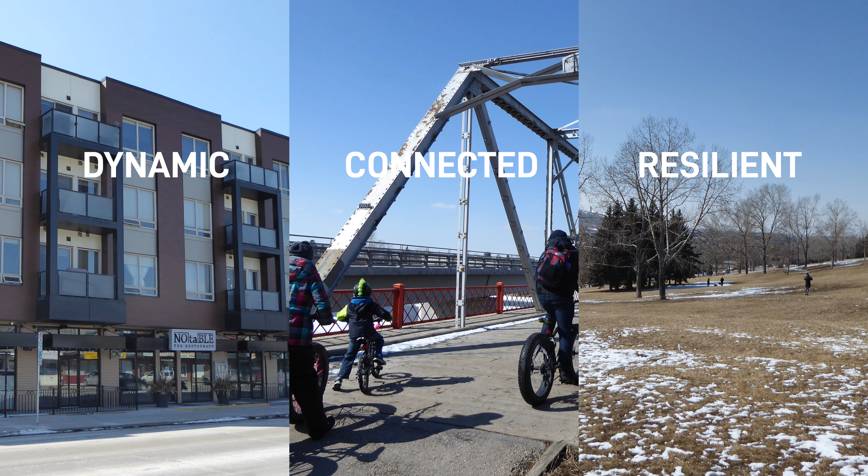Our future vision for Montgomery is a connected, resilient, and dynamic community, a great place for all to live. Our approach will be to connect through placemaking and find a balance between density, connectivity, and open space.

Land use density and built form. We aim to provide more housing and commercial choices to attract a diverse population. We strategically place the density along the main street corridors to encourage movement and active life on the street and support local businesses, create continuity and coherence in the built form, and promote resilience.

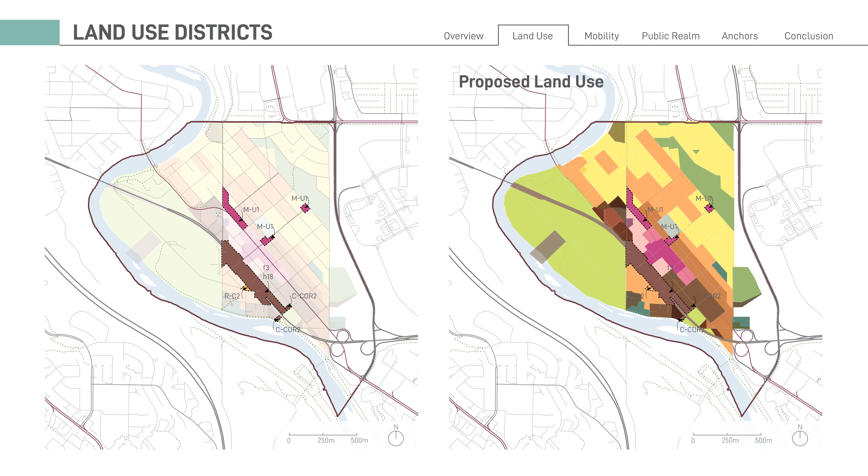This map illustrates the arrangement of the current land use districts in the community. Here you can see the suggested changes to the land use. We are proposing more commercial and mixed use along Bowness Road and at the two ends of 46th Street. We are also modifying the C-COR code on 16th Avenue.

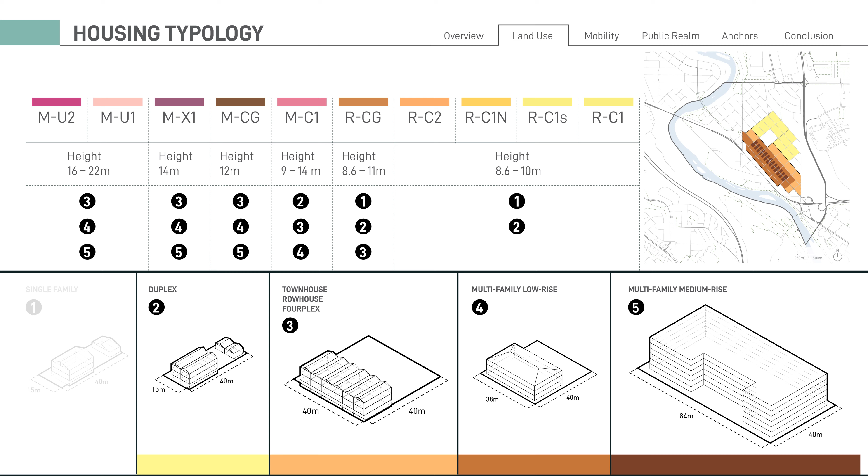Moving on to the housing. This map shows the proposed densification area and the placement of each housing typology on the ground. The single-family lots will be replaced with higher density types. The rationale behind this placement will be explained in the calculation section. The duplexes will be concentrated in this area on the map.

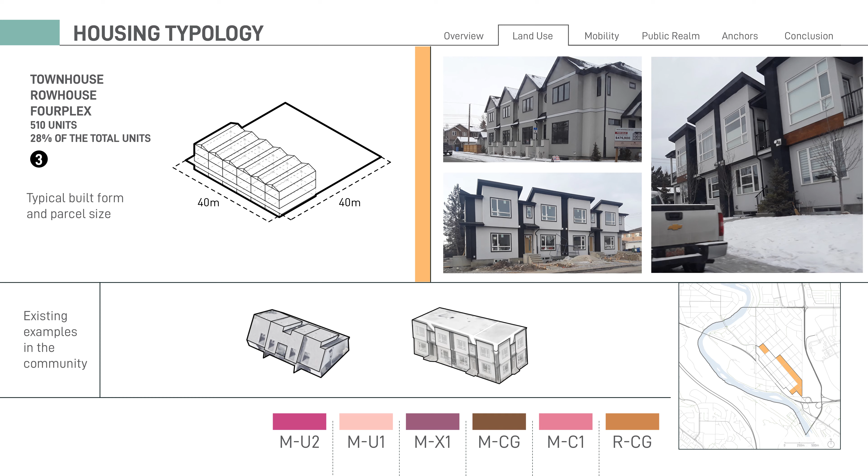Townhouses and row houses are indicated on the map. Multifamily low-rise buildings will be placed in this area. Multifamily medium-rise is indicated on the map. Considering the population growth, Montgomery will need around 970 new units by 2042.

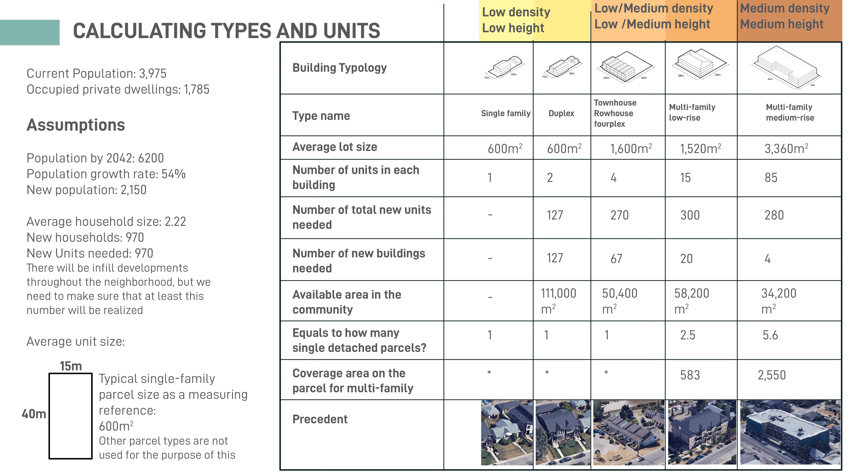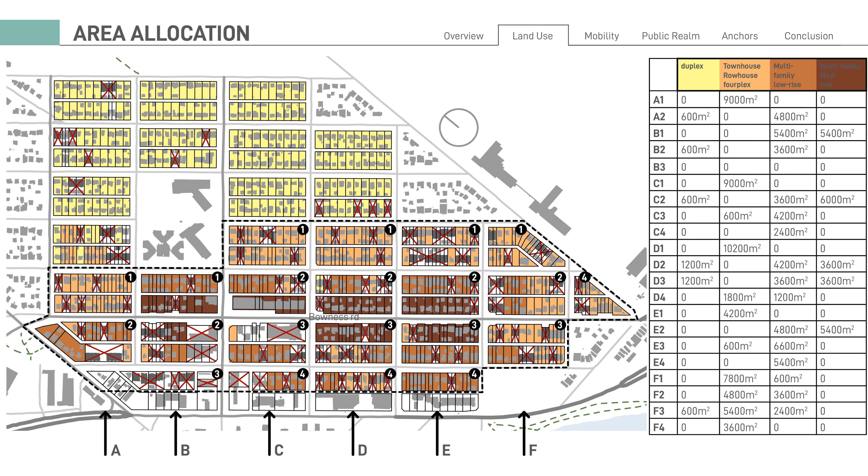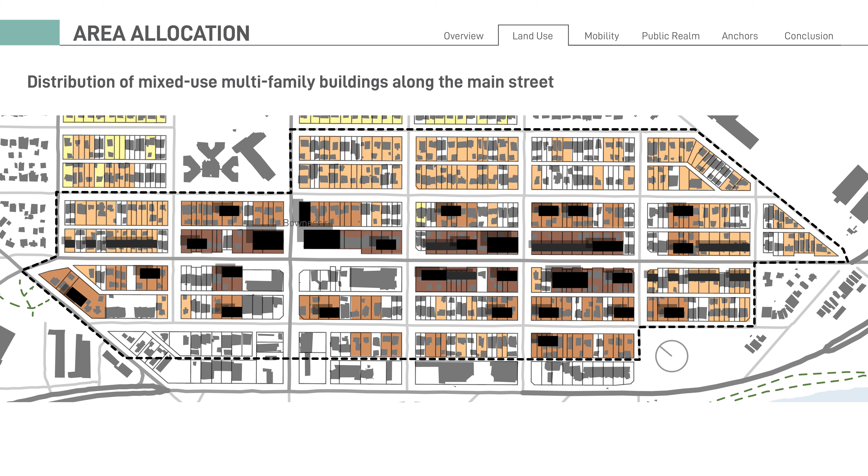This table demonstrates the calculations on the distribution of new units between different housing types. After calculating the development trend, we balance the outcome numbers with the density required for a good urban form. After excluding the lots that are not in priority for development, areas are allocated to the four housing types. This is an example of locating the mixed-use multifamily buildings along Bowness as the main intensification corridor.

Moving to the commercial use, we aim to create a destination with a diversity of businesses, including local independent shops, more coffee shops, restaurants, and food services. Older or vacant businesses should be renewed. We need to rebuild older shops to provide affordable commercial space and invite new businesses.

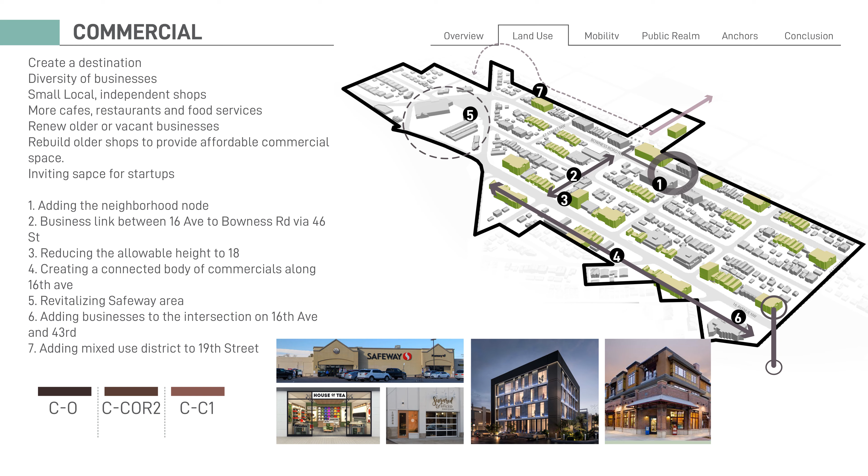Number 4 shows how we suggest creating a connected commercial body along 16th Avenue. Number 5 is about revitalizing the Safeway area. Number 6 suggests adding businesses to the sides of the intersection on 16th Avenue and 43rd for placemaking purposes. And finally, number 7 shows adding a section of mixed-use district to 19th Street to connect with the commercial core in the west. These diagrams represent the overall proposed massing along Bowness Road.

Here is the shadow analysis along Bowness Road in March, June, and December at different times of the day. Placing the taller buildings on the north side of the street and suggesting setbacks on the upper floors has helped reduce the shadow cast on the public realm.

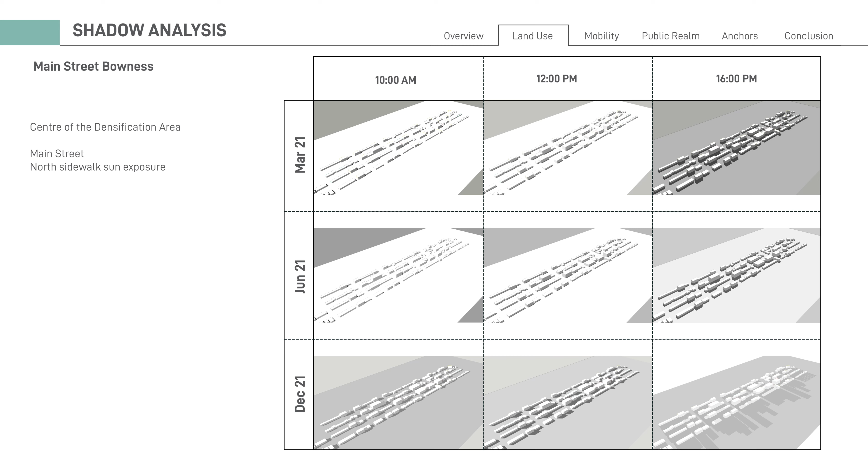Thank you, Azadeh. Now we will turn to mobility. Our goals for mobility include sustainable, inclusive, and safe year-round options. We will demonstrate improvements to the pedestrian, cycling, transit, and vehicle networks, following the city's sustainability triangle, placing walking as a top priority.

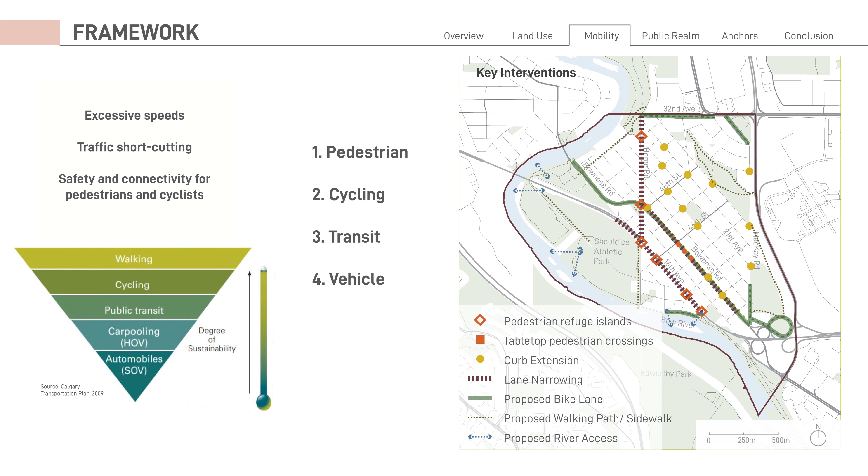A few of our key interventions, summarized on this map, include addressing the issues of excessive speeds, traffic shortcutting, and pedestrian safety and connectivity. Using a road diet strategy, we propose lane narrowing, as the map shows. Our goal is to change the character and feel of these roads, making them desirable connections and destinations. Lane narrowing makes room for pedestrian islands.

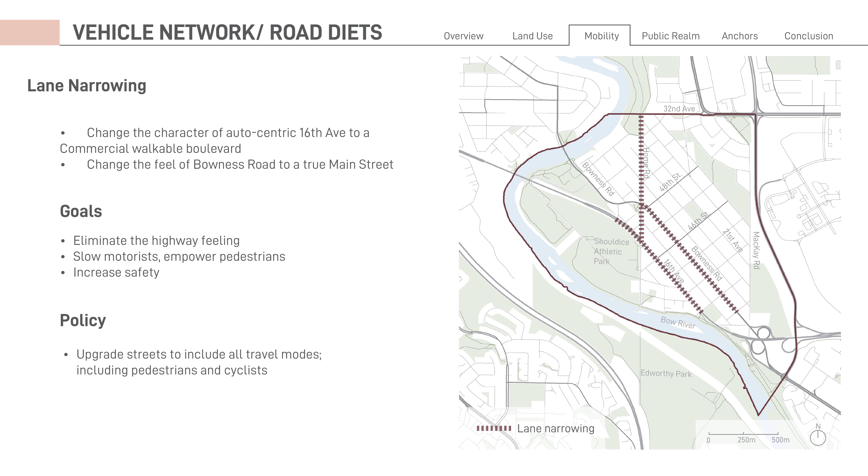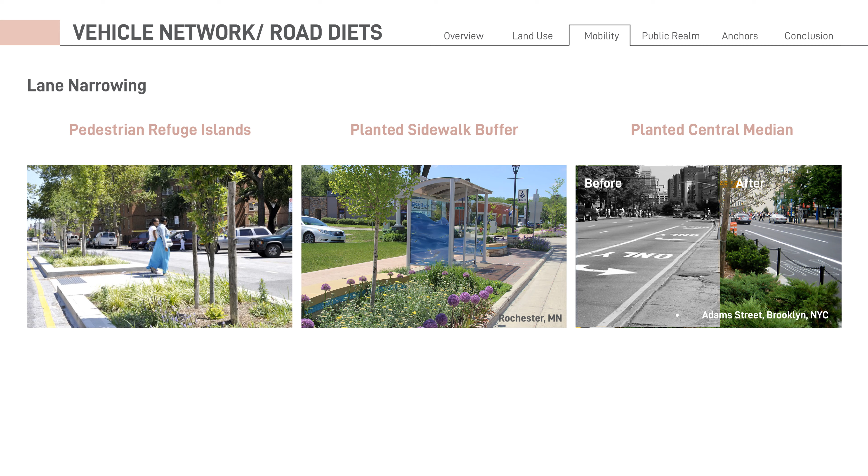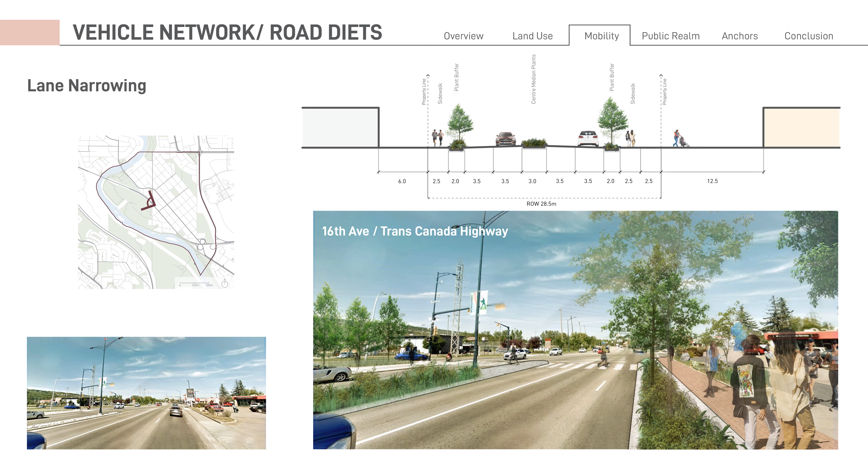Along 16th Avenue, we suggest a planted center median and side medians, as shown. Narrower lane widths gently guide vehicles to travel slower and will reduce the highway feeling. Lane narrowing along 16th Avenue plus pedestrian islands will change the highway look and feel to an urban boulevard. This will also facilitate crossing 16th Avenue and join the two sides of the community. Lane narrowing can occur at the same time as road resurfacing for cost savings.

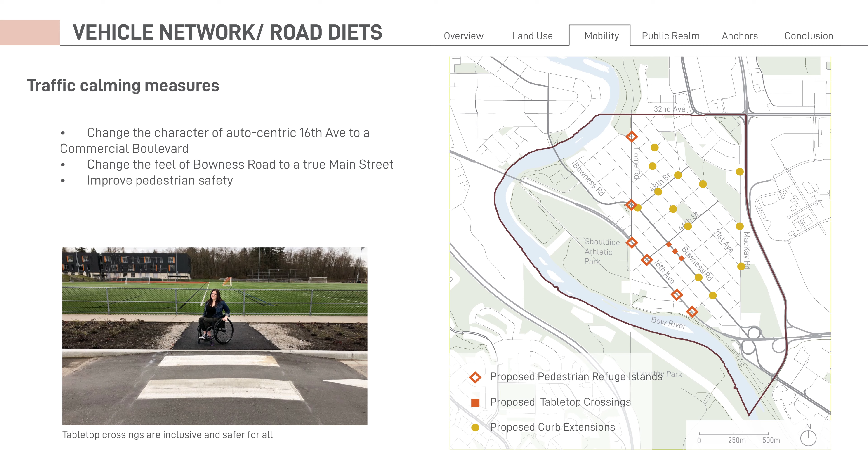Lane narrowing will be paired with several types of traffic calming, such as tabletop crossings shown here. These are to be added along Main Street as the map indicates. These crossings can reduce cut-through traffic, increase pedestrian safety, and take back Main Street as the place to be.

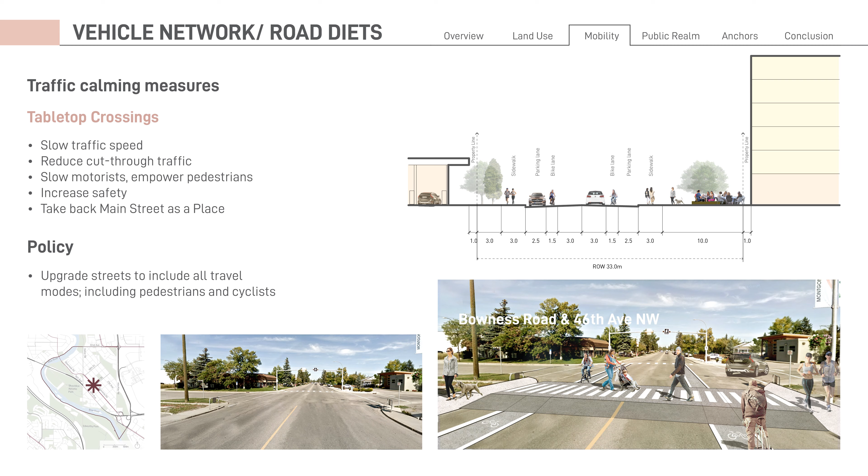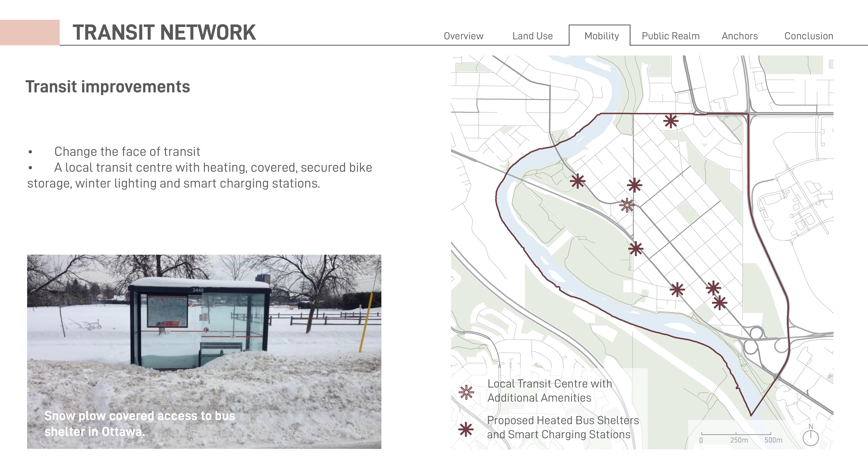Montgomery currently has few transit amenities. Creating a local transit center, as shown on the map, will offer additional year-round amenities. Situations as shown here must be avoided. Seasonal improvements include covered bike storage, heated bus shelters, additional lighting, and smart charging stations as shown.

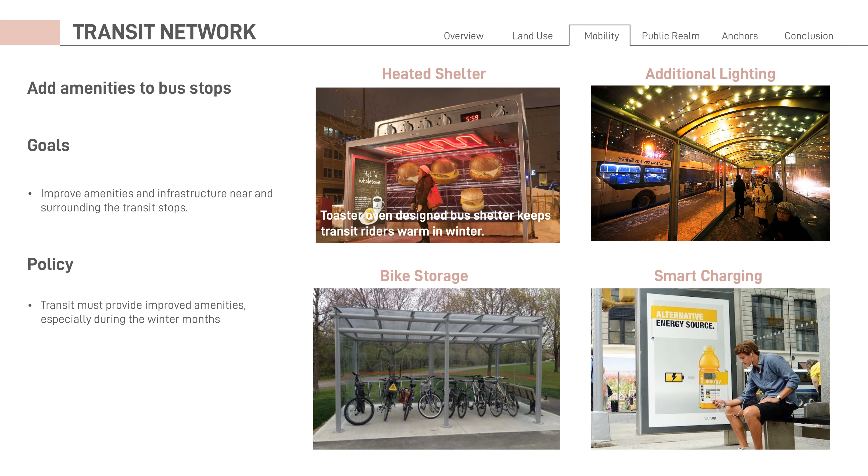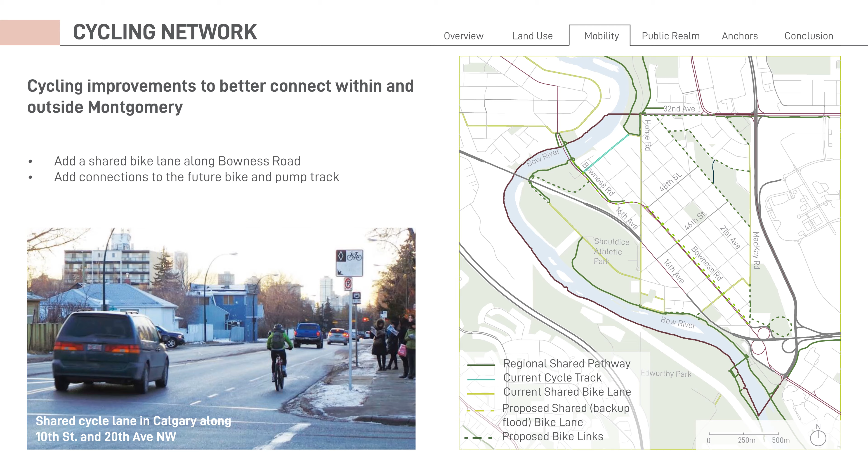This map reveals needs for the cycling network, and we propose a shared bike lane along Bowness Road. This bike lane is needed as a backup for the regional pathway system in the event of future flooding. We will improve connectivity, including the upcoming pump track, while supporting year-round cycle access. The proposed bike lane shares space with the main BRT route, which is a priority for snow removal.

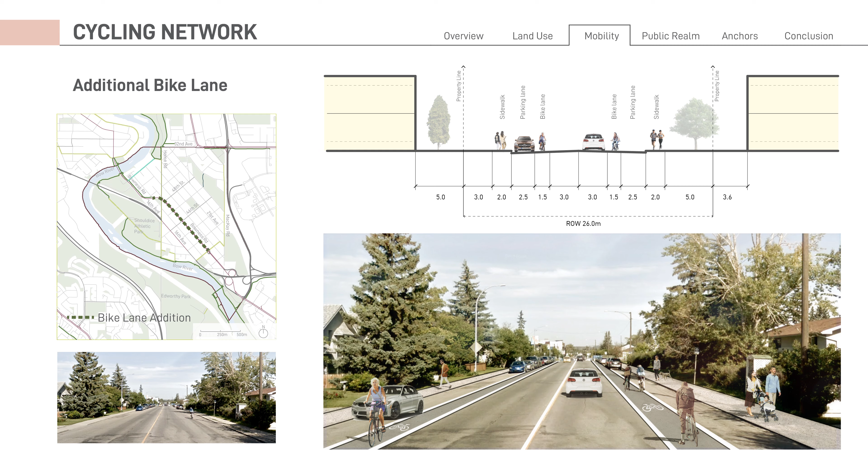Here we see how lane narrowing will accommodate a bike lane. Lane narrowing will slow traffic along Bowness Road and improve the character of Main Street. This bike lane links to an existing one, taking cyclists beyond Montgomery.

One strategy we have designed is loops for groups. This is a series of loops in the community used to arrive at key destinations. For example, Loop B, a shorter beginner loop, covers 3 kilometers. This loop caters to families and travels around Shouldice Park with stops along the river, community playground, and the pump track. Key destinations are marked on the map.

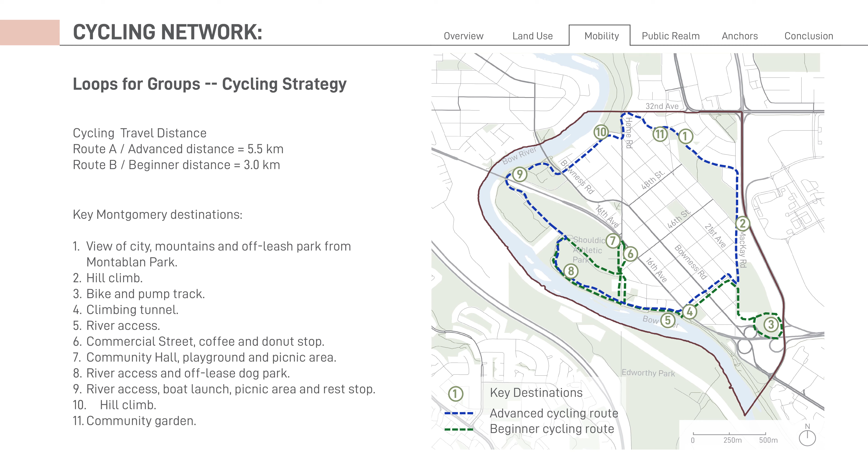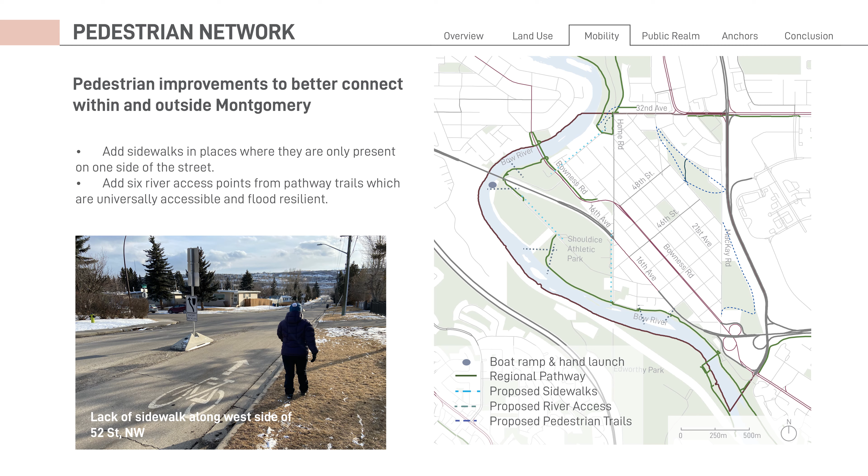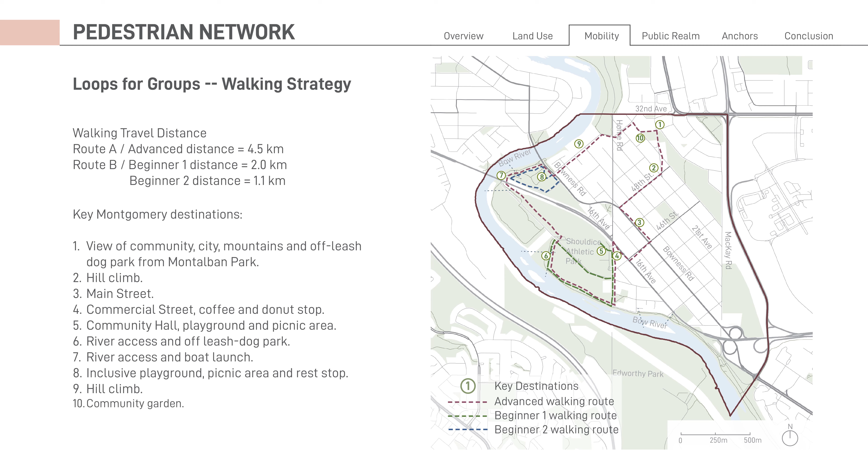Our pedestrian improvements include pathways. There are gaps in the sidewalk fabric, as pictured here, needing upgrades. We have also mapped out 6 needed river access points. Continuing with loops for groups, we have 3 pedestrian loops to accommodate all ages, traveling to key community locations as marked on the map. These include stops along Main Street, the community garden, and more.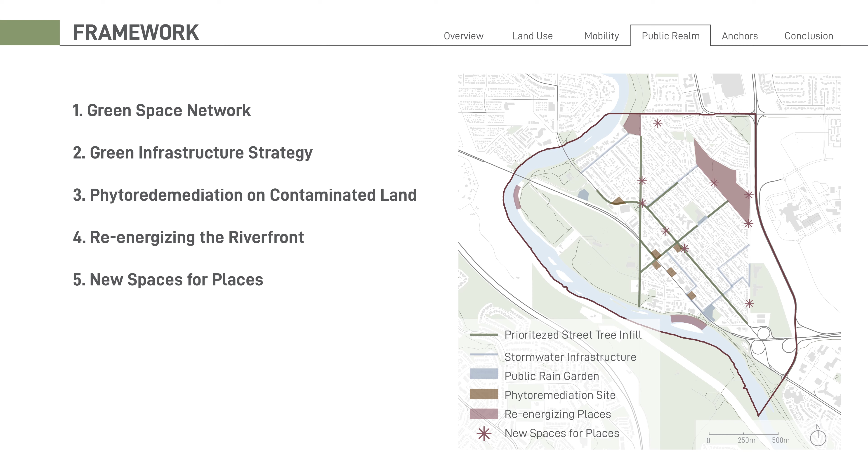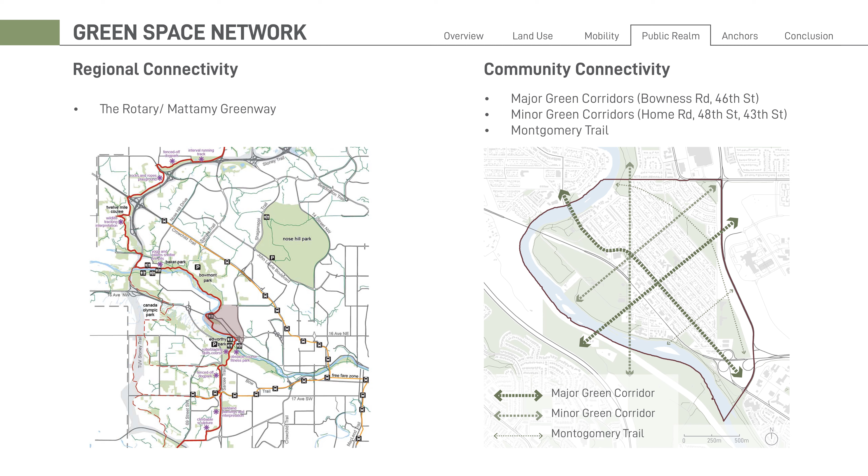It is important to have regional connectivity regarding green spaces to enable users to travel through and on to additional destinations. In these maps, we can see how we will link the various green systems, which also benefit urban wildlife. Our green infrastructure system will include a diverse number of features as shown in this matrix. The matrix further details where each of these features function appropriately.

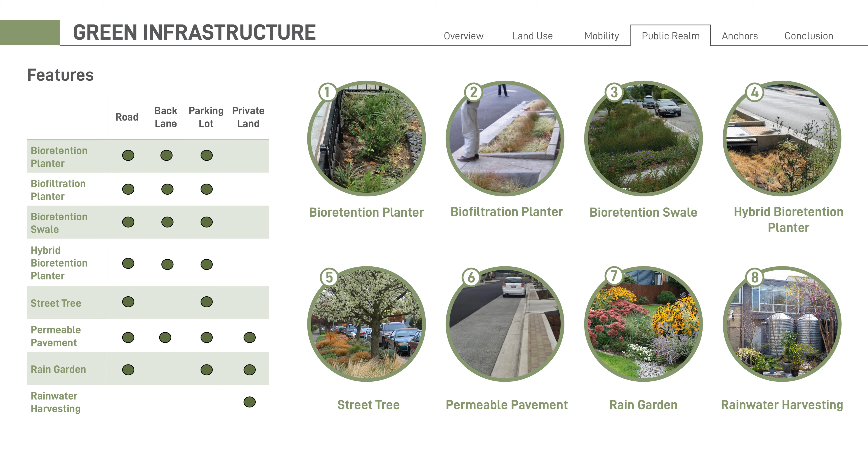In this map, you can find an improved connected network of street trees, where we identify needed areas for densification. We will make a strategic plan and prioritize trees for phased implementation.

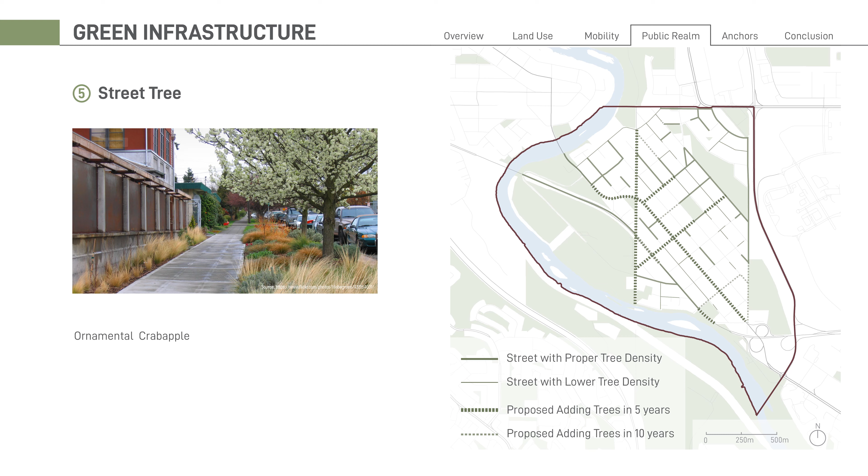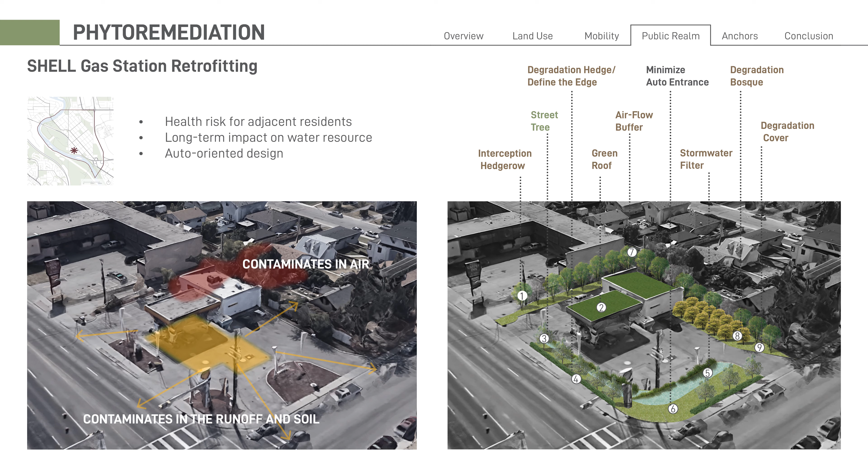In Shell Station, we can clearly see how specific plants can be placed to retrofit the gas station and help to remediate the contaminants. The proposed hedgerow helps to define the edge of the gas station and in that way provides pedestrians a safe buffer from the pollution source.

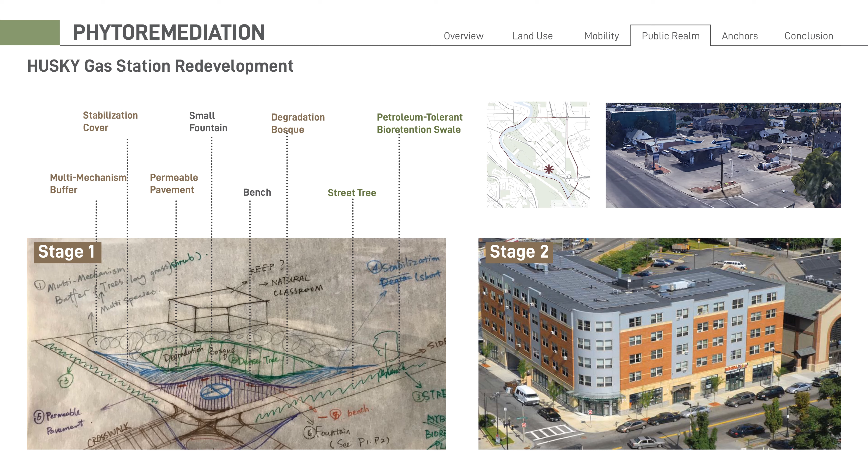For the Husky station along Main Street, we propose a redevelopment to eliminate the gas station entirely. This is supported by Policy C13 in the Montgomery ARP. This will be a two-stage process over some time. Stage 1 begins with phytoremediation, followed by Stage 2, a mixed-use building.

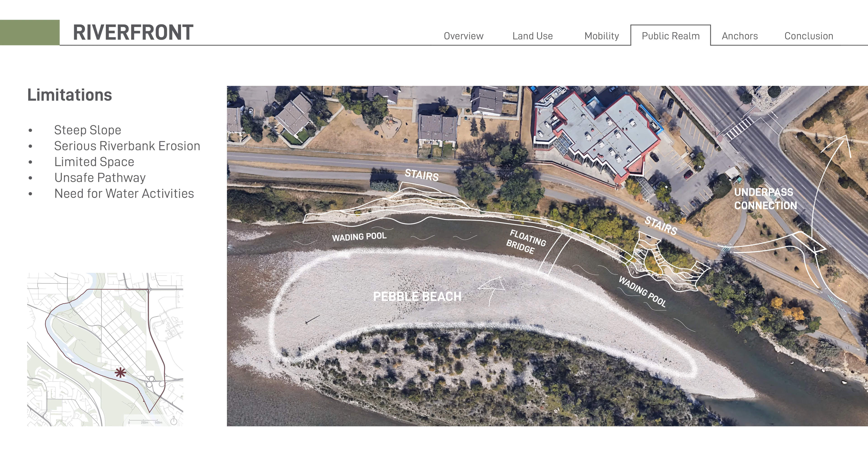Moving on, we find ourselves along the river across George Gale Park. This is our prime site for riverfront improvement, founded in the need to prevent further bank erosion. We will be upgrading this area with a set of flood-proof stairs and accessible ramps with a floating bridge and calm, shallow wading pool. In this image, you can imagine how this space will take shape, providing much-needed river access for Montgomery.

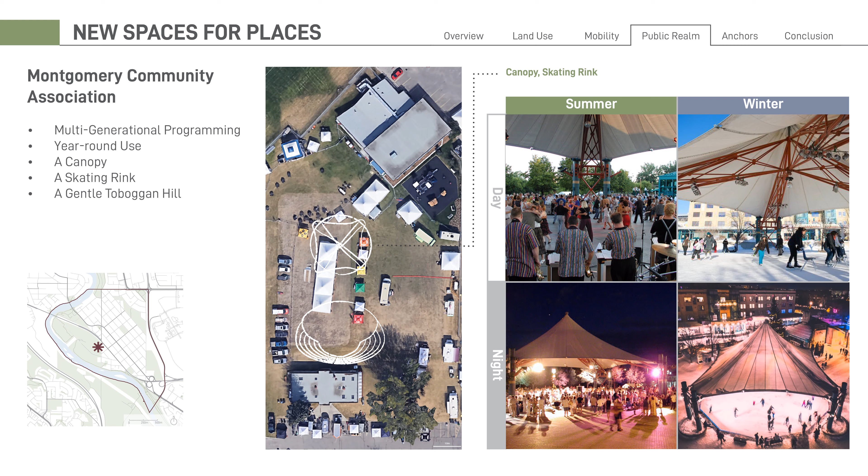On the side of the canopy is a gentle hill which can serve as a safe toboggan hill in the winter. The variety offered with these amenities are great for day and night use.

For the community, we need improved access to the river as a place to build community identity, but we also offer opportunity to program underutilized park space on both sides. The second anchor for placemaking is at the intersection of 16th Avenue and 43rd Street. Here is a location where the residents come out of the community and walk or bike towards the riverfront.

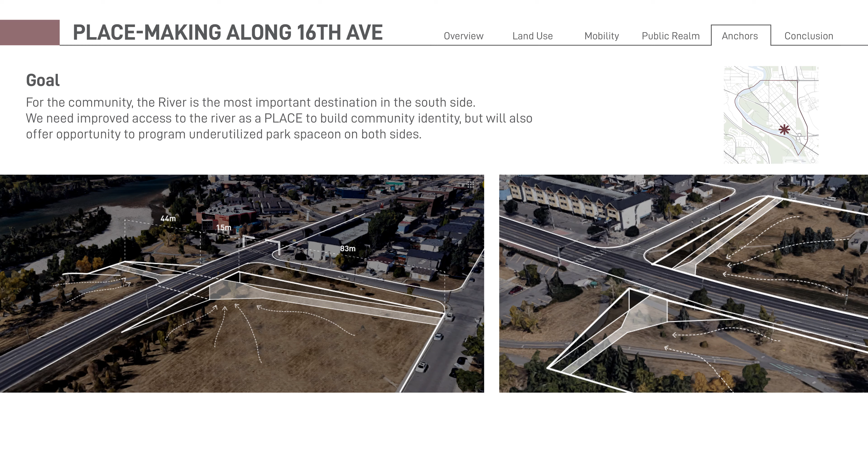We're proposing an underpass with mobile food shops on both sides. Fitness facilities such as a climbing wall will be installed in the underpass to support the recreational loop. Public art and interactive lighting are also part of the design.

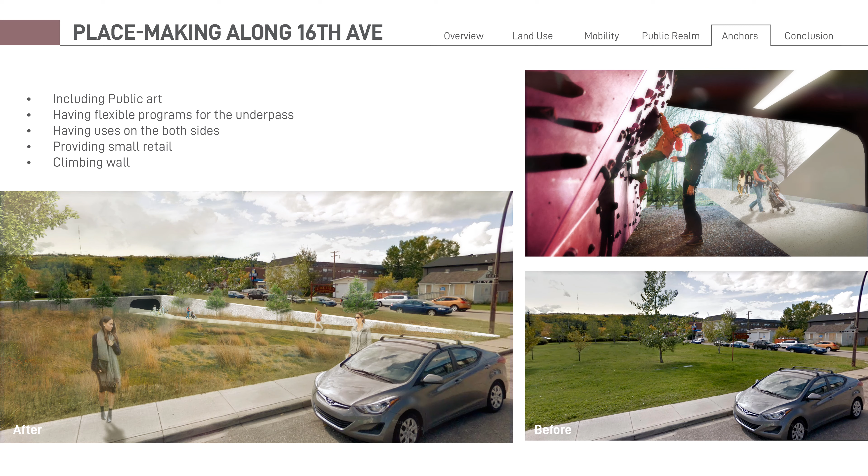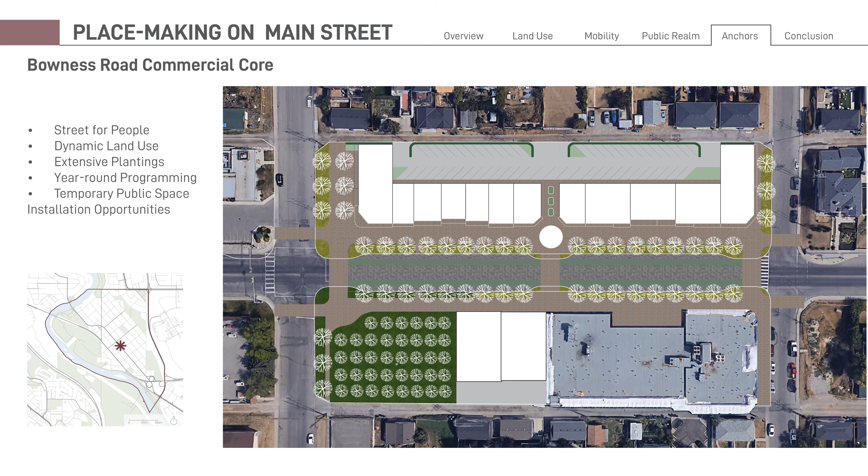And this is our last placemaking anchor. By lane narrowing, the main street will transform into a green main street with vibrant land uses on both sides and a range of flexible civic spaces for short-term installations. It also features extensive plantings, special pavement, heated awnings, patios, and playful street furniture. Seasonal changes will bring changes into the activities on the street, offering year-round and day and night events.

To conclude, we have provided details and design options for you, Montgomery, to address changes in your community. These details cover a range of housing options, improvements for connectivity, and upgrades to the open spaces to add identity to Montgomery. Montgomery has a great many places with a promising future. It is up to you as residents to decide how you will embrace it.